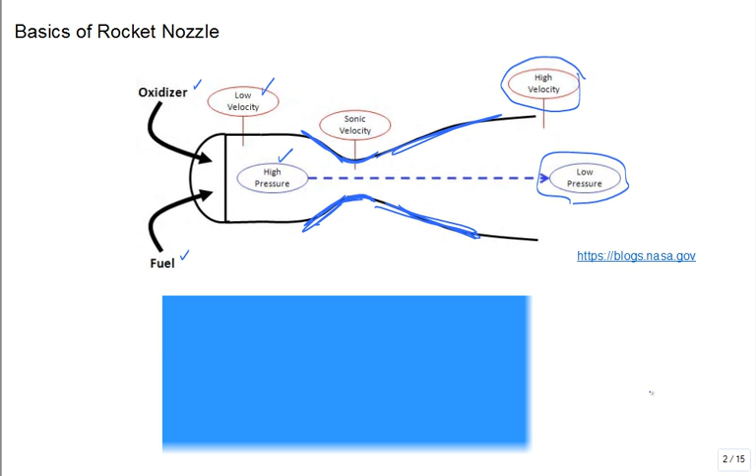So what happens here is you want the flow to come out close to the ambient pressure, a lot lower pressure than in the combustion chamber. And you want it to come out very, very high velocity. True or false? High velocity good for thrust? True? All right, let me ask the clicker question.

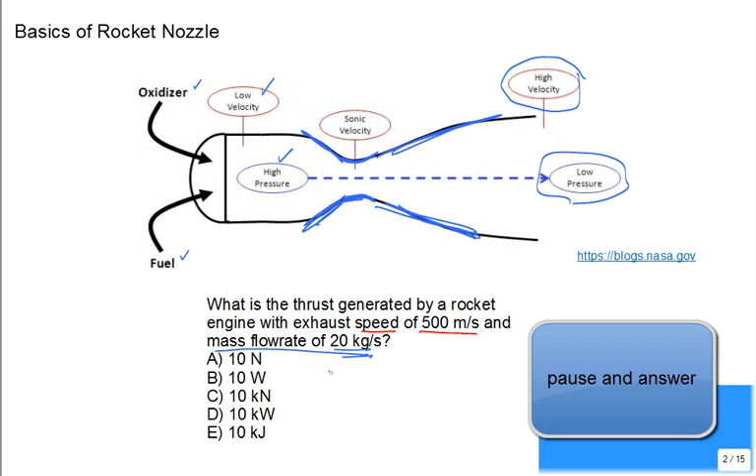So the clicker question is, what is the thrust generated by a rocket engine which has an exhaust speed of 500 meters per second and a mass flow rate of 20 kilograms per second? Everybody in? Let's wrap it up so we can move on. And we'll show the results. And the results show that a lot of people believe it's 10 kilonewtons.

Now, right away, the units on thrust are newtons, or units of force. So a watt is no good, and a kilowatt's no good, and a kilojoule. So you only had two to pick from, really, based on the unit consideration. And then you take a look and you recall 500 times 20. Can you do that in your head?

Is that right? But then you had the units of kilogram per second times meter per second. Kilogram meter per second squared is 1 newton. So 10,000 newtons, 10 kilonewtons. Congratulations to the 87% who did that correctly. Very good.

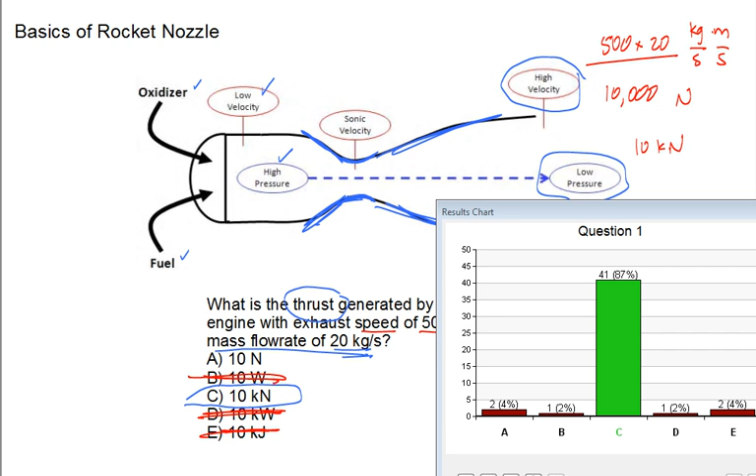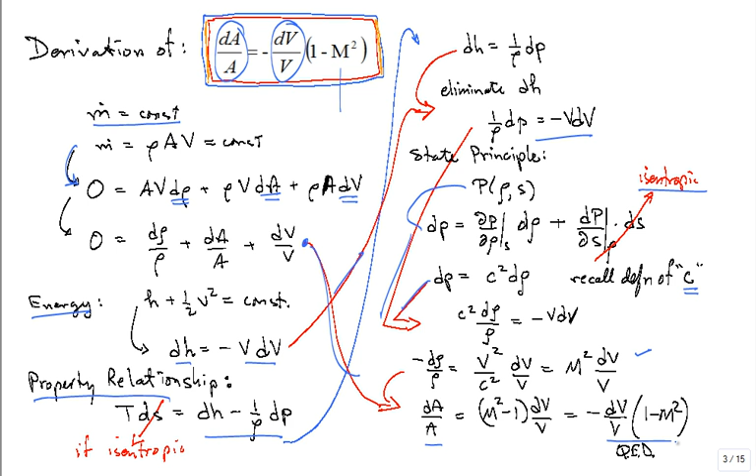But there is the relationship. So it's a combination: isentropic flow, ideal gas, and you've conserved mass and energy, and I already said isentropic, didn't I? And you've used the state principle. So there's the equation. I've just brought it over, just shown it to you again, okay?

So we're going to be thinking about flow in what we call a nozzle. Here's a nozzle. How does the area change in the direction of flow? It gets smaller. It's negative. Isn't it negative? It gets smaller. Okay. So we're restricted to a constant entropy process. True? Okay. How does the velocity change? Faster. It gets faster. True? Does this equation agree with that?

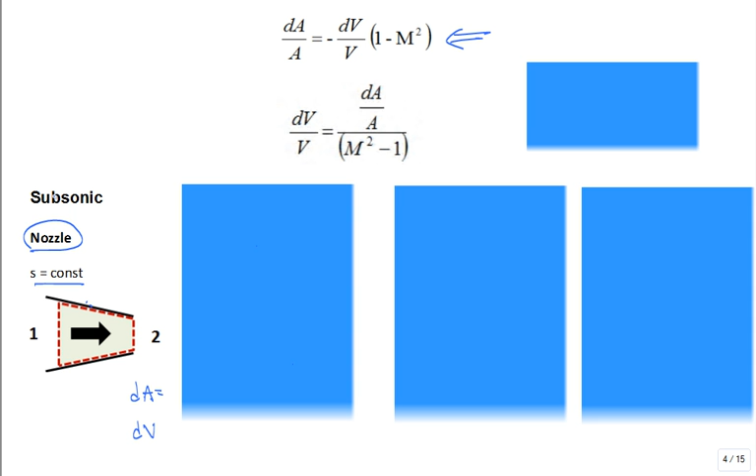Does this equation show that? Sure, let's do it this way. Take this equation and rewrite it like this. Did I do the algebra correctly by rewriting it? Thumbs up if you agree. Good. So now let's do this. I said let's only talk about subsonic flow. If I only talk about subsonic flow, what is M, the Mach number?

Less than 1. This is the numerator, this is the denominator of that ratio. So what is the denominator? If it's M squared minus 1, and M is always less than 1 for subsonic flow, what is M squared minus 1? Is it going to be negative? Does everybody agree? Then how does the area change? The change in area over area. That's a negative. Okay, so if I have a negative over a negative, positive, the velocity is going to increase in the direction of flow. That's how you use this equation.

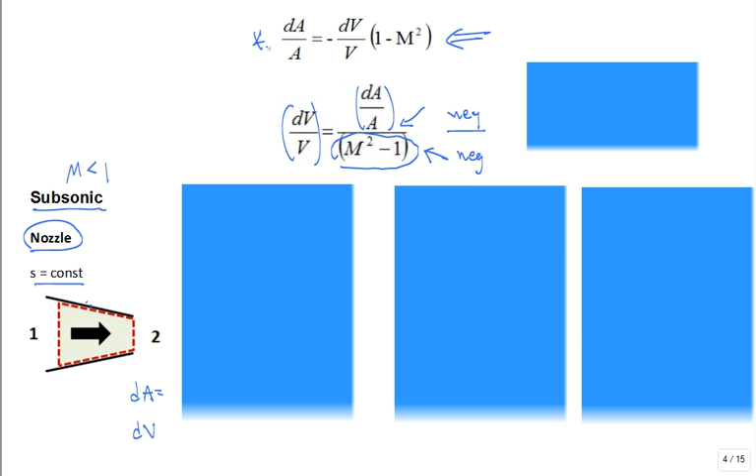Do you like that game? Ready to play another game? What do you think's under this box? The diffuser. All right? It's still subsonic. So take a look at this ratio right here. Isn't that still negative? But what about the dA over A? It's now positive. Positive over negative? Negative. So what does dV do? It slows down. It decreases. That's right. You're good.

Guess what's under the next box? We've already changed how the area changes. We said, let it go down. Let the area go up. Now you're going to change the Mach number. If I said it was supersonic, what does that mean about the Mach number? Greater than 1. Go back to this. What does it say about the denominator right here, if the Mach number is greater than 1? Positive.

All right, let's go back to something that's shaped like this. The area is converging. The area is getting smaller in the direction of flow, is it not? So what is the dA? Getting smaller, over area, which is always positive. Isn't this negative? So if I have negative over positive, is it negative or positive? It's negative. So dV over V is negative. How can that be?

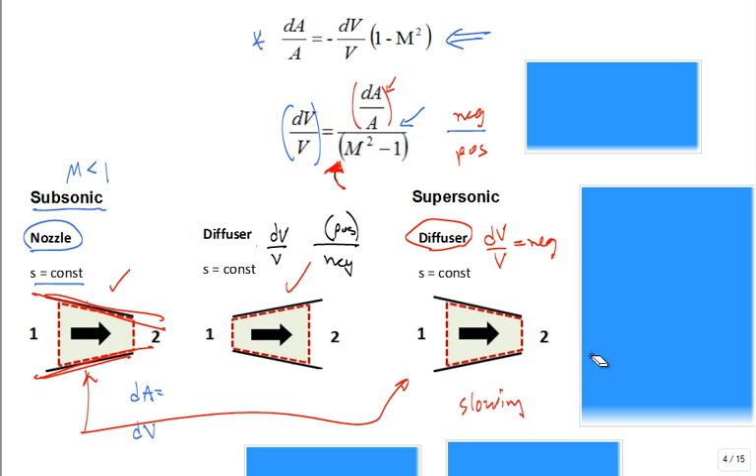First time you see that, you say, something unbelievable is happening. I'm going to be able to regurgitate this for the test, Professor, but you will never make me believe this. True? Isn't this crazy? This is absolutely crazy. All right, so then you go underneath this box, and we do the other shape. What's the area doing here?

Increasing. It's an increasing area. It's diverging. Increasing area, diverging section. This was a converging. Let me write it down. This is a diverging section. If it's supersonic, the Mach number is greater than 1, what happens to the flow in a diverging section? Does it speed up or slow down?

Looks like it has a lot more room, doesn't it? It looks like it should slow down, but it's supersonic. This is going to speed up. We would call that a nozzle because the flow is speeding up as it goes through it. It looks like a subsonic diffuser, but it's a supersonic nozzle. All of it from this equation.

Wow, that equation looks like we have some errors in it. No, it's been vetted. A number of people have checked it out. It works. It's in the textbook too. Go and look at the derivation of it. I know I blew through that derivation quickly, but that's an important equation, isn't it?

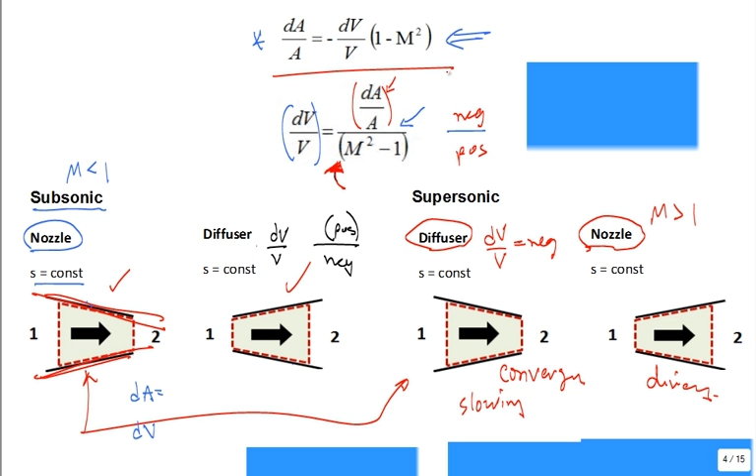Here's off a NASA website. What are they doing? Oh, they're talking about nozzle design. And they say a CD nozzle. Oh, everything's abbreviated. A converging, diverging nozzle. So here I have a combustion chamber. Then I have a converging section. Then I have the throat, which is the smallest area where it's changing from converging at the throat.

It changes to diverging. Diverging section, what happens to the cross-sectional area for the flow? Gets bigger, larger, right? That's what we're talking about. Converging, throat, diverging, converging, diverging nozzle. Look at this equation, m dot equal to a constant. We just did it. Yeah, the textbook does it. What is this? Calculus. What is this?

Well, they did it with the momentum perspective, but we're hot after all the energy. But if you did this in a fluids class, go open up your fluids textbook, go back and look at the compressible flow section. They're probably going to take a momentum, not an energy approach, but it's the same result. You have isentropic flow, and you combine them, and there's our big equation. They made it red.

Here is a great little description. They say for subsonic flow, what's that? Mach number less than 1. Increasing area, so dA is greater than 0. It's increasing area in the direction of flow. Causes the flow velocity to decrease. dV is less than 0. Likewise, I've been saying the same thing in words. For supersonic flow, increase in the area causes the flow to speed up, to increase.

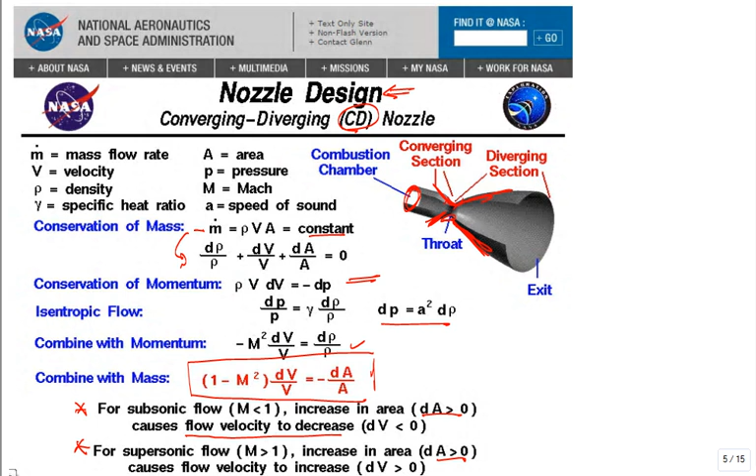You all good? Last call. Anyone have one? Also, I think I showed this last time, a De Laval nozzle. I don't have a picture of the man. I should get a picture and tell you what years he lived and where he was from and all that. But you can find that out on the internet. But this is a converging, diverging nozzle, and it really kicks out the gases at the exit if you have a high enough pressure in the combustion chamber of that nozzle.

So the velocity will get to be, well, actually at the throat you get Mach 1. The velocity is the speed of sound at that temperature, whatever the temperature is in the throat. And then if it's in a supersonic region, the diverging section, the velocity continues to go up as it's going down that nozzle.

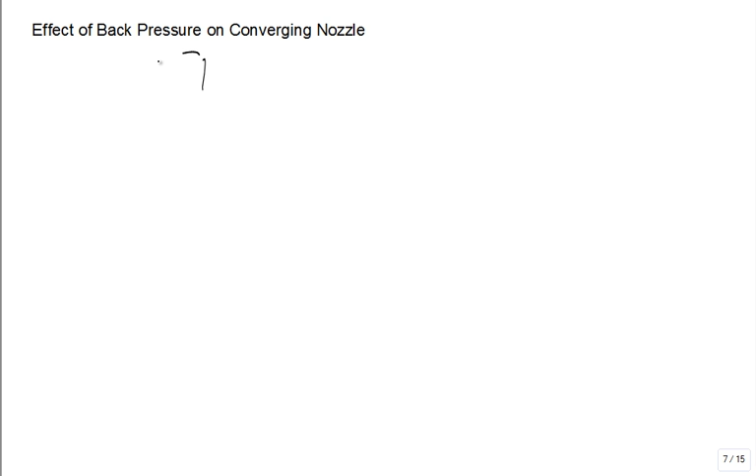So let's back up a little bit and just walk through a classic discussion of the effects of back pressure on a converging nozzle. I'm going to do just a converging, then we'll do converging, diverging. So what we have is a chamber that's able to supply a constant pressure. We'll call it P naught, not the back pressure, but a stagnation pressure. And T naught, ideal gas like air, supplied to a nozzle.

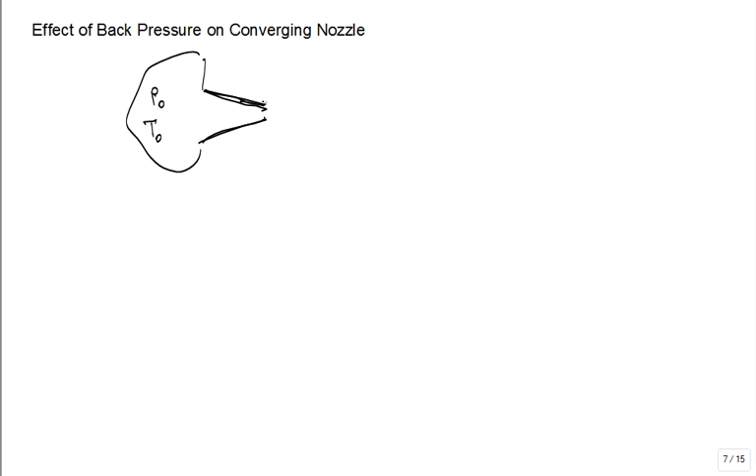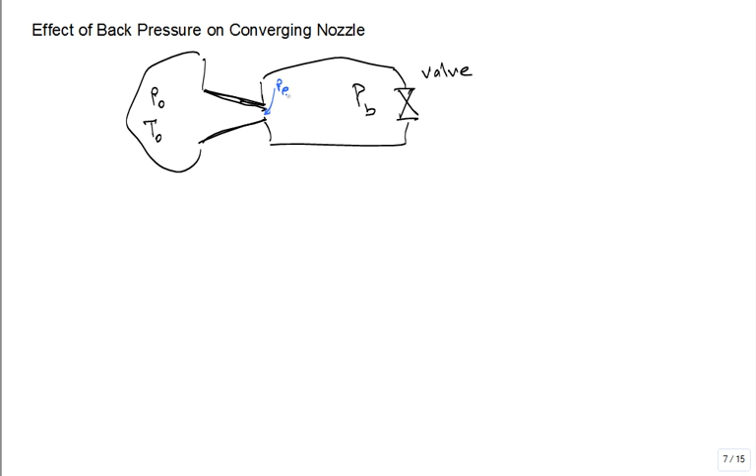Here's the nozzle right there, okay? And then at the exit of the nozzle it goes into a large chamber which you can control the pressure on using a valve. So we control the back pressure in the chamber near the exit of the nozzle. So we're going to talk about the pressure at the exit of the nozzle, the back pressure, and the stagnation pressure, supply pressure, P naught. Is that too unclear, P naught?

And what we do is we put a plot like this. This is distance going from the beginning to the end of our converging nozzle. And we're going to plot pressure. Now, conceptually, put a large P naught on there. Not so unreasonable, but let's say 10 atmospheres. That's reasonable, but it's high enough. A nice good 10 atmospheres, right?

And if you open this valve outside, guess what the air pressure is outside? 1 atm, 1 atmosphere, okay? So you can make this go 1, 2, 3, 4, 5, 6, 7, 8, 9, 10. So 10 atmospheres. And let's put P naught equal to 10 atmospheres to begin with, okay? I keep the valve closed.

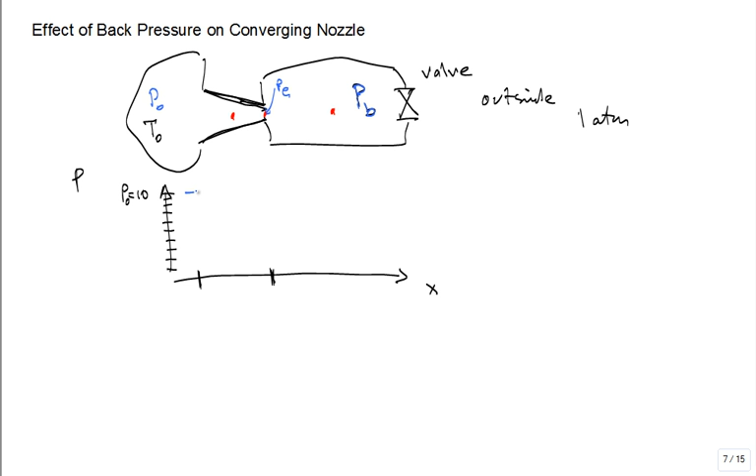What's the pressure halfway down the nozzle if the valve is closed? It's a really easy answer. It's P naught. How about at the exit? The pressure is P naught. How about way over here? Back pressure, P naught. It's just all the same pressure. I kept the valve closed. So I can plot that as my beginning case. There's the pressure at every point through the nozzle. And out here is the back pressure.

True? I open the valve a little bit. Is it going to fall all the way to 1 atmosphere? No. It's going to go to 9 atmospheres, right? So let's say now the back pressure is 9 atmospheres. Okay? So what do you think the exit pressure is right there? 9 atmospheres. The flow is going to be coming out straight like this. The pressure across those streamlines as it exits into this larger back pressure chamber is the same as the back pressure.

Okay? So what about the pressure over here? I said the pressure over here is always going to be P naught, 10 atmospheres. Does the pressure go down? Is there a little flow like that? Is that what the pressure does when I open the valve a little bit? Makes sense? Sure. How about if I go to 8 or 7? Sure. It's going to come here. It'll be 8 or 7, go back up here, and it's always steady P naught. I have something to be able to maintain P naught there, the supply.

Keep going. What do you think the velocity is at the exit, the speed at the exit in the first case? 0. What do you think the velocity is at the exit for the second case? A little faster. How about the next case when I drop it to 7? Do you think there's more flow going to be coming out if I drop the back pressure to 7? Yes, that's right. It'll be more. But guess what happens? If you drop it to around 5 atmospheres, you're going to get something special.

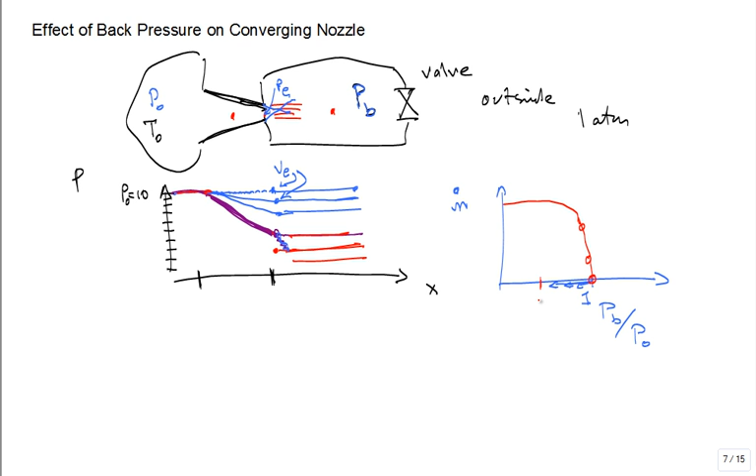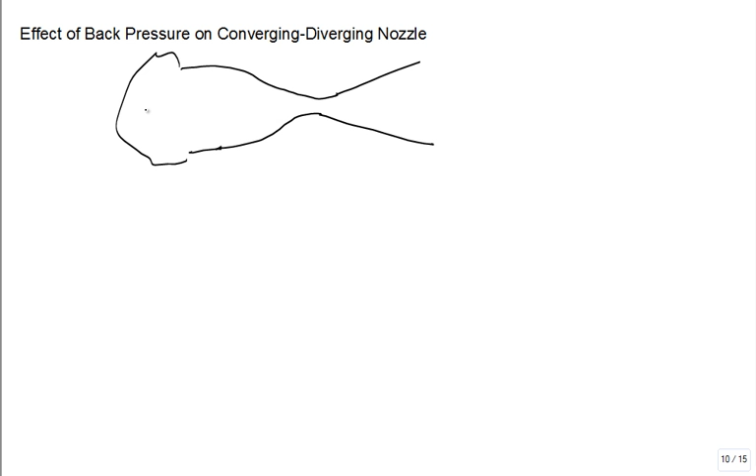Well, let's now talk about a converging-diverging nozzle. So now you have a section that has the converging section, the throat, the diverging section. And we'll do a supply P naught here with T naught. And out here we'll put a control system with a valve. And we'll talk about the back pressure, the pressure at the exit of the nozzle, and the throat pressure. But let me just leave that off for right now.

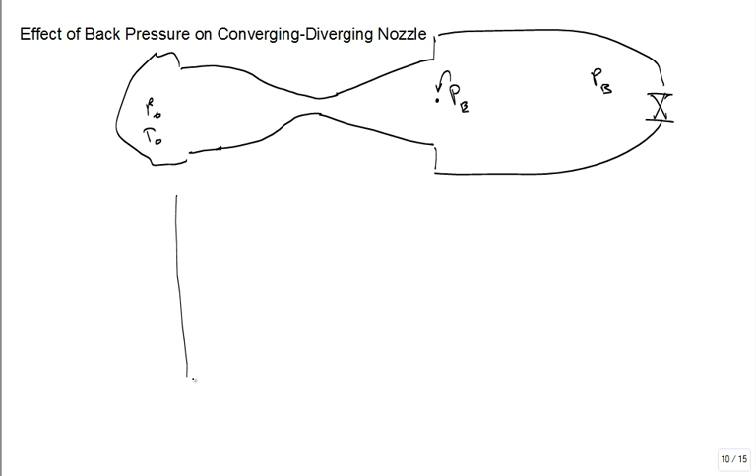So let's make a plot as a function of distance, x, where this is the exit, lining up there. This is the throat, line it up there. This is the entrance region. And let's say it's 1 ATM, 2 ATM, 3, 4, 5, 6, 7, 8, 9, 10 ATM. There's pressure going up. And here's P naught at 10 ATM. Great high pressure. It could be 20. That's okay. Now, we start with the valve closed.

What's the pressure look like everywhere? It's all 10 ATM. We open the valve a little bit. We open it to 9. The back pressure is now 9. What do you think is the exit pressure? 9. Okay, this pressure way over here is still 10. Something happens in between. Does it just go like this? No.

Because this whole section looks like a converging followed by a diverging area. Okay, let me ask this. Do you think it jumps right away to supersonic flow? Could it stay everywhere subsonic? I mean, at 10 there's no flow, drop it a little bit. You think it's going to stay subsonic? Yeah, it's going to stay subsonic. 10 to 9 isn't enough to make it go supersonic, okay? So it's subsonic. So where's the minimum pressure? At the exit?

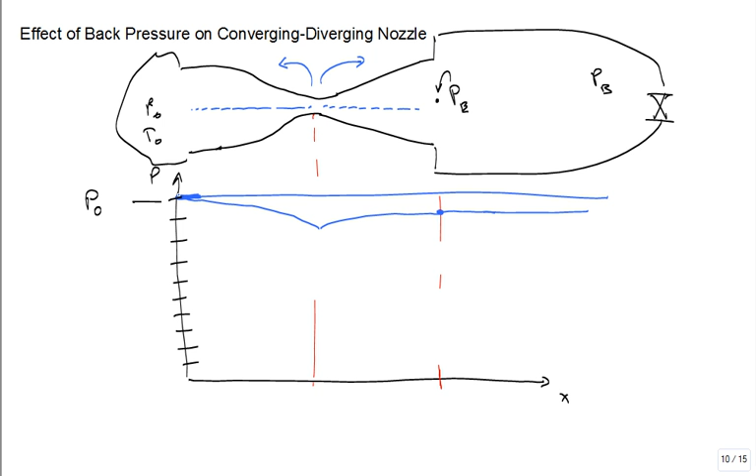Well, no. Think about this. What's happening to the pressure as I move in this converging section? Down, down. What happens to the pressure as I go in the diverging section? It's going back up. It goes down, down, down, hits a spot, goes up, up, up, until it hits the exit. So guess what? That's what the pressure profile looks like, true? Where's the minimum? In the throat.

Okay? Where we're changing from converging to diverging. Let's say we drop it some more, and maybe the pressure of the throat's even lower. Right? Let's drop it some more, and then we hit some spot. Uh-oh, this pressure gets down to about half of the P naught. It's now Mach 1 right at the throat.

But before we get to Mach 1, put in your mind 0.999 Mach, just a little below. If it's just a little below, it hits the throat, then it starts increasing area. What's it going to do? It's just going to stay subsonic, and it's going to recover. Pressure is going to go back up. Now in your mind, you go a little above.

You put the back pressure a little bit below, and now the pressure in the throat is sufficient to really bring it all the way to Mach 1, and it really wants to be supersonic, and so it starts to be supersonic as it starts to go into the diverging section. So it'll stay like this. It won't increase above Mach 1.

The pressure will stay at that throat pressure, but it'll get even lower pressure further into the diverging section of the nozzle. The flow is now going a little bit above Mach 1. But guess what? You didn't lower the back pressure low enough. Boop. What do you mean boop? What's that? Boop. You're going to hit a shock.

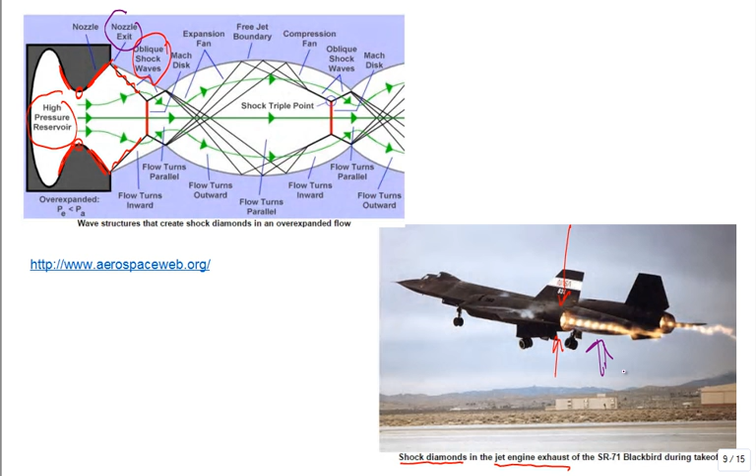All right, here's a picture off the aerospaceweb site of how the back pressure, ambient pressure, affects the nozzle flow. I don't want to say it's trivial, and I don't want to go into all of it, but it shows they expand out some if the ambient pressure is less than the nozzle exit pressure, and if it's a good match, exactly the same, then you have the straight flow.

When the ambient pressure is a bit more than the nozzle exit pressure, then you get some shocks and start to get this formation. And then you can even move those shocks back inside the nozzle if it's much more than the nozzle exit flow pressure.

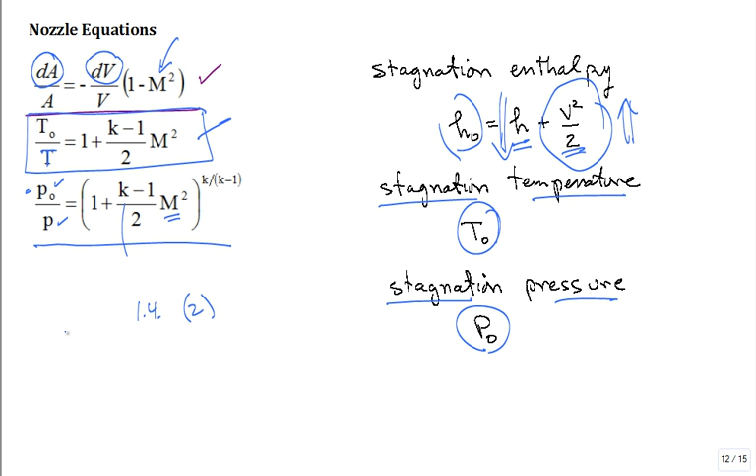We're speaking specifically of ideal gas. Ideal gases. This is restricted to ideal gases. Otherwise, get a computer code. Make sure it's big. So these are our equations, here, here, and here. I have a question for you, a clicker question. So we'll turn it on and see the question.

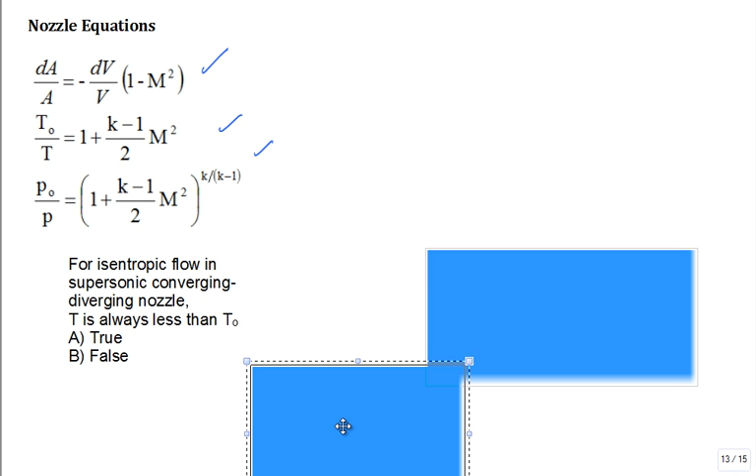For isentropic flow of an ideal gas in a supersonic converging diverging nozzle, the temperature T is always less than the stagnation temperature T naught. True or false? Are we all in? All right, let's go ahead and shut it down and poll people. And let's see. Well, it's split, isn't it? Well, it's isentropic flow. Can I include any discussion of a shock? Nope. So there's no discussion of shock because it's isentropic, right?

And so does this equation apply only when it's subsonic, only when it's supersonic, at all times? When does this equation apply? At all times, right? And so is the Mach number ever negative? Well, even if it is negative, it's squared, but it's never negative. It's 0 up, right? 0 to 1, then it's above 1, right? So look at this equation. How about K? I mean, it's 1.4.

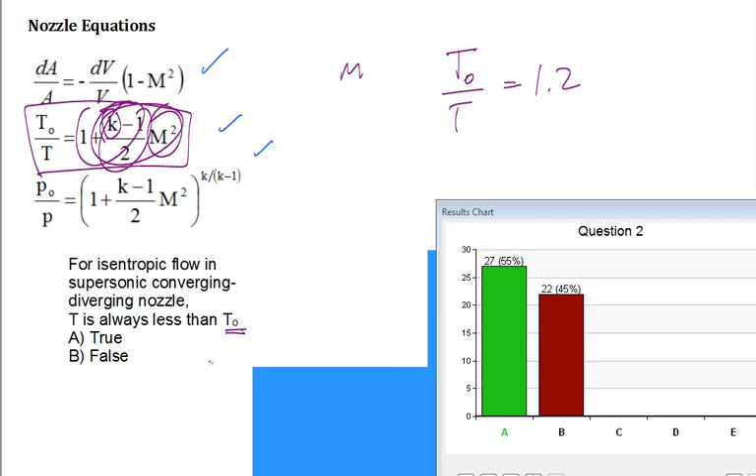It's greater than 1, so this is positive, positive. This is all positive. And so it's going to be greater than 1. Maybe T naught over T would be like 1.2. Make sense? 1.05. So what about the temperature? T is always less than the stagnation temperature. True. You ready for the next question? Why not?

For isentropic flow in a supersonic converging diverging nozzle, P, the pressure, is always less than P naught. True or false? I think everybody's in. We're all in, so let's go ahead and shut it down and see where we're at. Well, we have 81% correct, which is better. Okay, so look at this equation here. You see the Mach numbers, this all positive, positive. It's all going to be greater than 1.

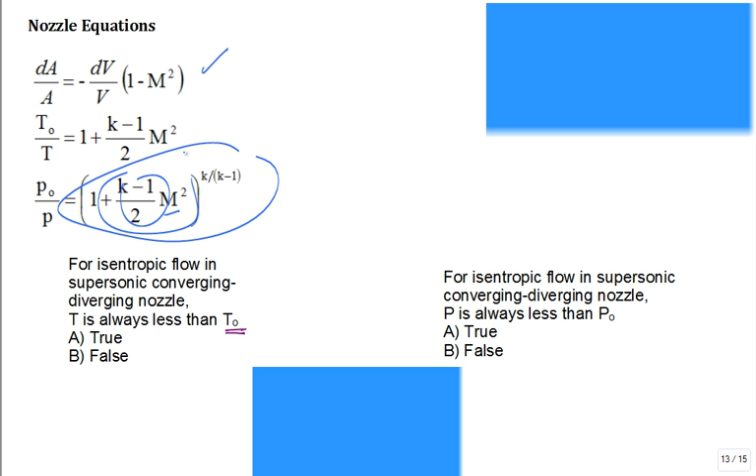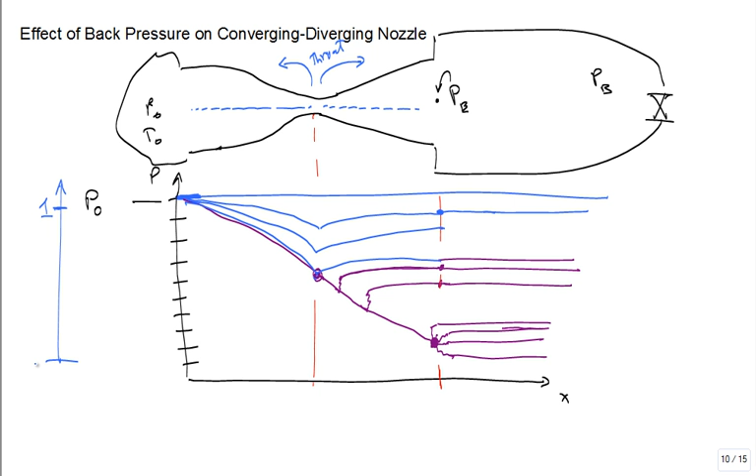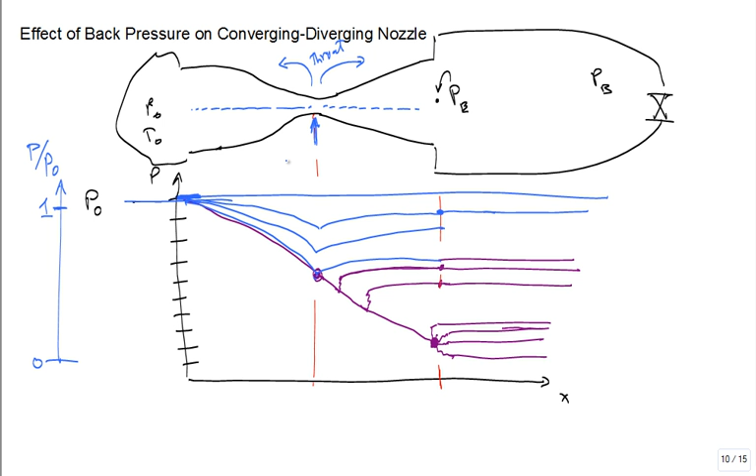Remember also I was plotting, where was that plot? Back here. What are we plotting? Another way to plot this is if I put it on a scale from 1 down to 0, and I could plot P pressure divided by P naught. The pressure ratio is always dropping below P naught. You see that? It's always dropping below. Where is the pressure the lowest when the flow is completely subsonic? The pressure is lowest at the throat, right, when it's subsonic. Yeah, at the throat.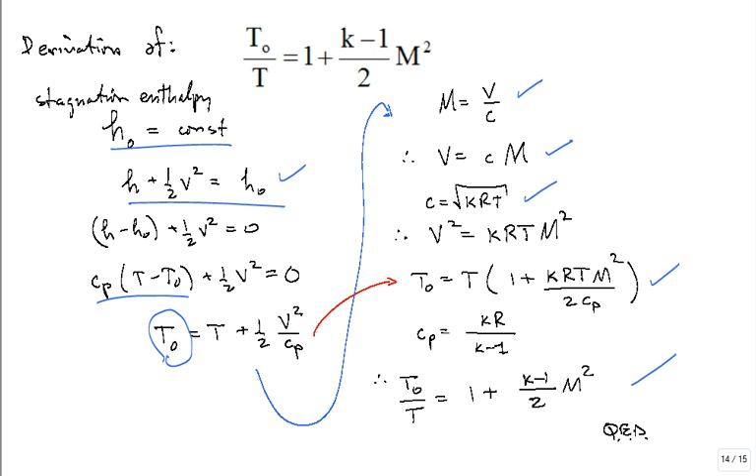So, okay, there's a couple derivations. They're in the textbook. You can see them where you say, what is enthalpy? This is a conservation of energy statement. Apply constant specific heats. There's your T naught. Come over here. What's this? Mach number defined, speed of sound in ideal gas, constant specific heats. Combine them, manipulate, and there you go. Okay? So please take a look at those derivations in the textbook, and we'll continue the discussion Monday.